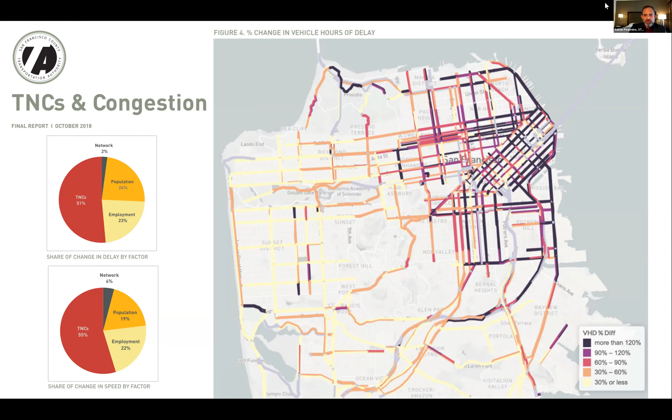In addition to congestion, and actually one of the causes of that congestion, is that our roadways simply aren't built right now to give Uber and Lyft, and even in many cases taxis, very many options for pulling over safely and picking up and dropping off passengers. So not only is this impacting congestion in those communities, it's also impacting safety in those communities. And those are two key issues that we want to solve.

But as was pointed out a few years ago when some of these first studies were coming out, let's not apply all the blame of increased congestion to Uber and Lyft.

It really is still the private vehicle that is the number one cause of congestion, even in our urban centers that have rail and bus transit options. Collectively, TriMet and other peer transit agencies are looking at how they can use transit to connect with these other first and last mile solutions to help solve this problem and get people out of the single occupant or private owned vehicle and into other modes.

So AJ, why don't you pick up here for some of the things that public transportation can do about this, that we talked about in the earlier session. Sure. What we talked about is that TriMet has been creating mobility hubs. These are areas where all different modes congregate, and you can easily transition from one mode to another, to try and transition the industry towards mobility as a service, like a utility.

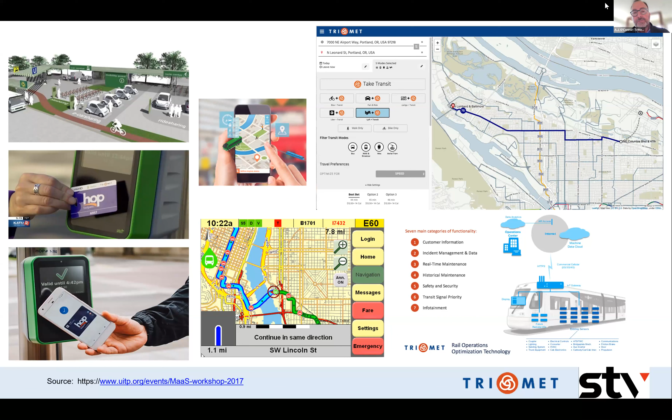The lower left is an example of our electronic fare hop fast pass system. The middle screen is what a bus operator can view on their mobile data terminal, showing their route, and we can send detours to it. Essentially, that's the functionality we want on our light rail vehicle. The diagram in the lower right corner is of our light rail vehicle and the type of functionality we want to bring to it that we currently have on our fixed route bus fleet. Next slide.

So what we're going to talk about the rest of this presentation is how transit is working with cities and other partners, and how we're combining infrastructure, policy, and investment, specifically how we're focusing on corridors and high capacity service. The one project that wraps all these themes together is our next generation transit signal priority system. It really is a good example for all the points we're trying to accomplish.

If you want to go to the next slide. When we talk about next gen, we have to explain what the old gen is, and the old gen is depicted here. It is an optical transit signal priority system where the bus emits infrared and it is line of sight, and there is an optical detector, usually placed on the traffic signal pole, that receives that signal and passes it to the signal controller to decide whether transit signal priority is granted or not.

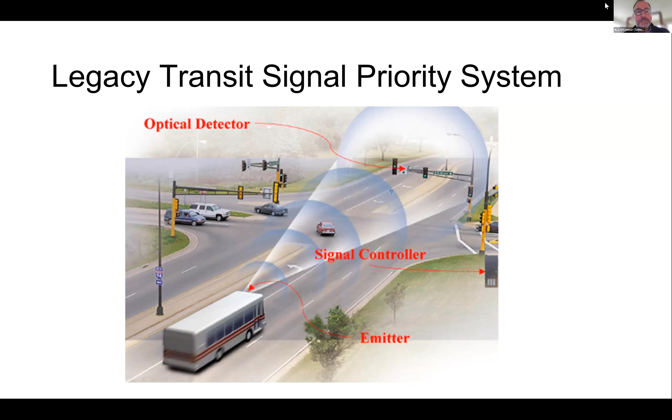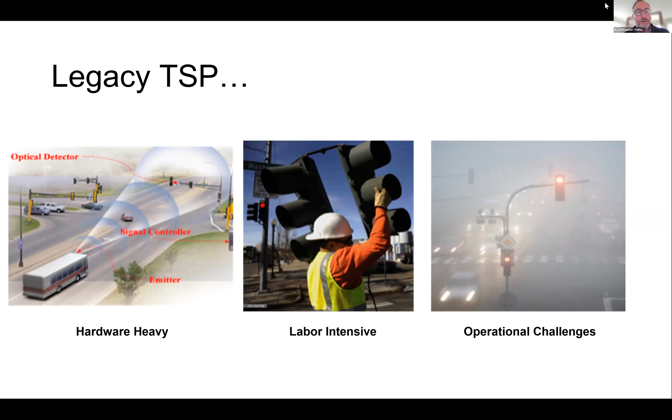Now, 25 years ago, this was cutting edge technology, and at that time TriMet was one of the first major transit agencies to implement any kind of TSP. But it has some limitations, which we're now addressing. As this slide shows, it's hardware heavy - you have to have an emitter in the bus, you have to hang that optical detector on the light pole, and that detector has to be cleaned and ranged. When severe weather happens, which is not uncommon in Portland, sometimes the signal has difficulty being received. Next slide.

So this is how that legacy system is currently set up. On the left side, there's the emitter on the bus, connected to an onboard computer that determines whether the bus is in a particular zone where TSP is present. That onboard computer also knows if the bus is behind schedule. If those two conditions are met, it will turn on that emitter. So it's really what we call dumb TSP - it's very limited, it has to be in range and behind schedule, and that's the extent of it.

And you can see it's detected and then communicates to the traffic controller. There's one other thing I just want to mention on this slide on the existing or current gen architecture: we're also showing the onboard vehicle communicating over that cellular network to the transit center.

So this architecture is communicating between buses and TriMet's dispatch center. This is where bus operators can communicate with dispatchers if they have any sort of problem, security issue, or incident, as well as the transit center being able to communicate out to bus operators when there's detours or other things. But more importantly, for today's topic, there's a steady stream of data coming off of those buses about where the bus is, its heading, direction, speed, how full it is, and other data sets around whether turn signals are on and other types of things. We'll talk about why that matters in the new architecture in a little bit.

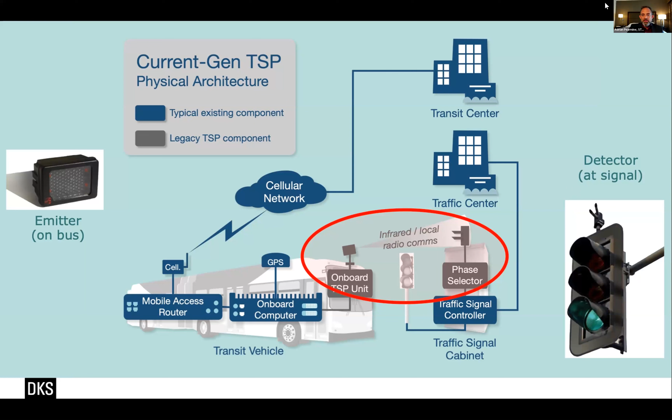So I'll pick up back here for a couple of quick slides and then hand it back to AJ in a second. He mentioned the trends we're seeing around transit agencies working directly with their traffic partners, and that's a pretty critical trend we've seen in a number of markets.

In the Portland metro area, this study was done quite a few years ago now with our traffic partners, the Portland Bureau of Transportation, leading the charge and doing a study on enhanced transit corridors. We've seen similar studies in Seattle, where they call it speed and reliability, and many other markets are starting to look at this. What's happening is that the traffic partners and the transit partners are both recognizing that they can't do high speed, high frequency, high reliable corridors by themselves.

From the perspective of transit, they need their traffic partners to do things like queue jumps at certain intersections that allow buses to jump ahead of other cars and get a dedicated signal for just a second, or business access and transit lanes that can be all day long or just in peak periods where buses have access to them. So there's a whole kit of parts that our traffic partners can implement on their traffic network that transit can take advantage of. And this is just one study.

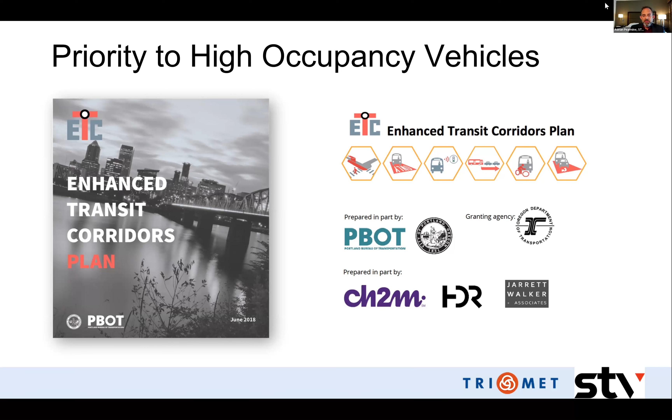Within our Central City in Motion plan, which was a related study PBOT also did, you can see that when done properly, this partnership between our cities and our transit can move a lot more people per hour per lane in buses than we can in the single occupant vehicle. So going back to the early motivators for why we need to be working together between traffic and transit, that figure tells a lot of it.

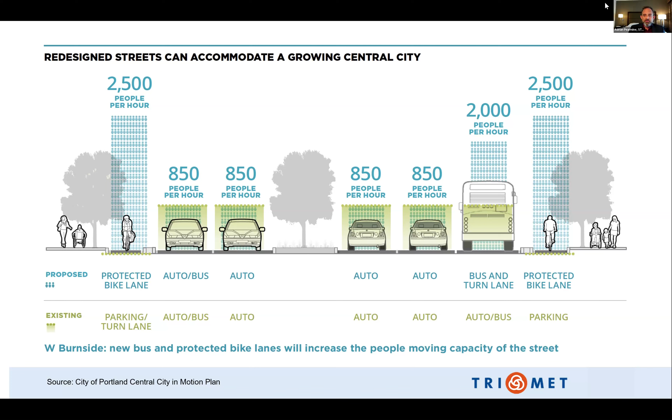As we continue to invest in bike and pedestrian infrastructure and have protected bike lanes, and look at other modes like scooters and how they share that, we can again move even more people through these sections of our roadway network than we can in single occupant vehicle.

As AJ talked about, a lot of this comes together in one particular project. If you can just present the bigger picture of what the Division Transit Project is about, and then how TSP fits within that, AJ.

Sure. So the Division Transit Project was TriMet's first foray into essentially a bus rapid transit system. We picked a corridor that stretched from the east portion of the metro area into downtown Portland, and it required cooperation among 3 different governments: the city of Gresham, which is a suburb of Portland, the Oregon Department of Transportation, and into Portland, the Portland Bureau of Transportation.

It was designed to be branded specifically FX, and we changed our color scheme for that. We procured 60-foot articulated buses that had particular design features: a middle door and rear door, 3 doors total, and electronic fare validators throughout the bus as opposed to just in the front.

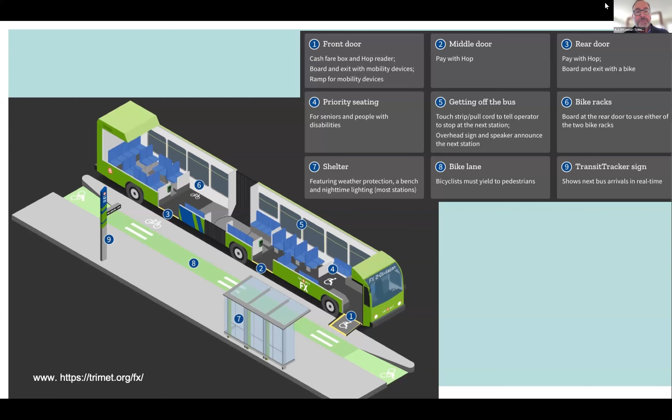So you see the cutout here of the buses and the various aspects that were improved on Division. Adrian, if you can go to the next slide, we'll see an actual picture of what it looks like in practice. You can see the green line is the dedicated bike lane. It's a little hard to tell, but we have much better signage and lighting at all these locations. Next slide.

It was originally called the Route 2. It was rebranded as the FX2 route. And the red rectangle box is where we implemented transit signal priority. The downtown core, we are not allowed to have signal priority in the downtown core, so that's why the section on the left does not have TSP.

One thing to note about this corridor, it is radically different from the east end to the center. On the far right is the suburb of Gresham, and we're talking about a typical suburb, wide streets, not very dense. As you move in towards downtown Portland, it becomes significantly more dense. It's really sort of a tale of two different applications, so it's kind of unique in that regard as well. But it's been a big success.

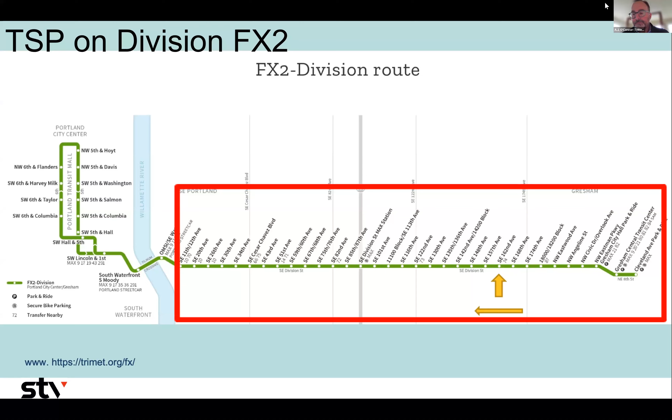Next slide. So this is what we eliminated on this corridor. We no longer required the onboard TSP unit for those dedicated FX route buses. We were able to do that because we have a dedicated fleet, and we did not require the detectors. They are on this route, though, for Portland Fire, who still uses the old TSP system.

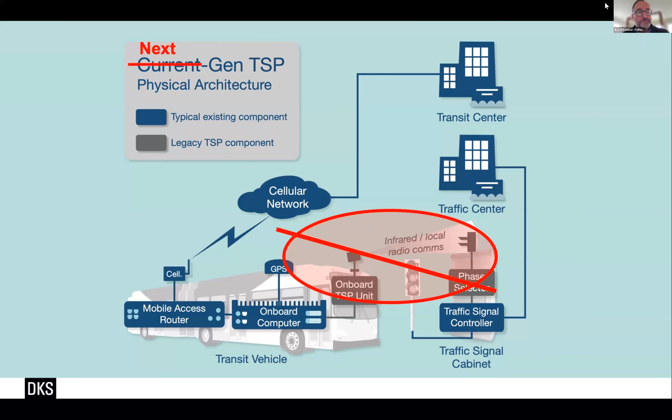And here's the same new architecture slide showing what's in place now. We hadn't mentioned this before, but Light, LYT, is our cloud TSP partner. And you can find out more information on them if you Google Light, LYT AI.

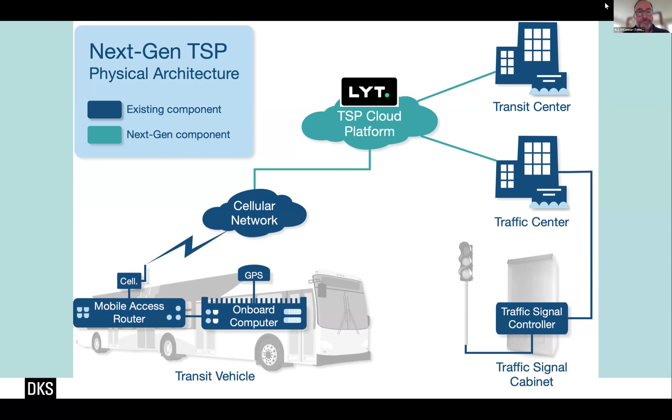So where are we going with this system? One of the big advances with this system is not just the removal of the hardware, but this slide really shows the data flows and how that goes through our system.

Like I said before, the big contrast between the old system and the new system is the amount of inputs we can put in when priority is needed and where. We have so many more inputs than we did with the old system, so many more factors to consider when we grant TSP.

Likewise, on the right side, when the TSP is granted and processed, we now have the ability to really evaluate how that's performing at the individual signal level and along the whole corridor. So this new system really advances the capabilities and the analysis we're able to provide.

One other comment on this slide - as AJ talked about with the current or initial architecture, the signal's not aware of the bus approaching it until it gets within line of sight and a given distance. I say given distance because there's an optimal distance if that equipment is clean and set up directly facing the emitters, of a couple thousand feet, and that only degrades further from there.

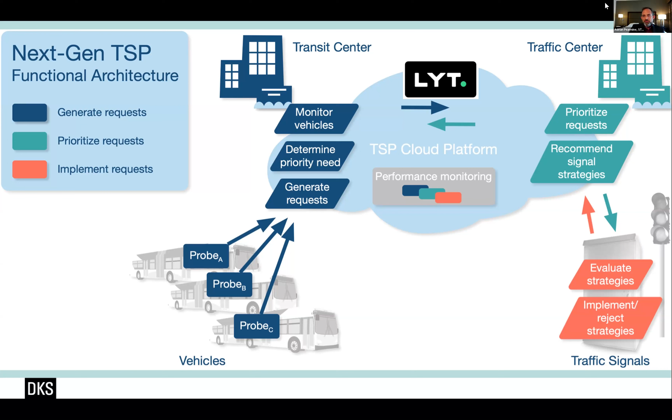Whereas this cloud architecture, the cloud platform is sending estimated time of arrival of when the bus is anticipated at a given signal, well in advance of when that signal could see the bus. So the controllers themselves have more capability to try to get in alignment to either extend the green time and get the bus through that intersection, or truncate red times in other phases if possible, and try to get it lined up to where the bus arrives on a green.

I want to just talk about our reality for the next few years. This slide is basically saying that while we'd love to get rid of that infrared local communications immediately, as we did along the division corridor, it's going to take multiple years to roll the next generation TSP out across all the existing corridors. So we're going to have a hybrid reality TSP physical architecture for years to come, where infrared is still used on corridors that have not swung over to the new system.

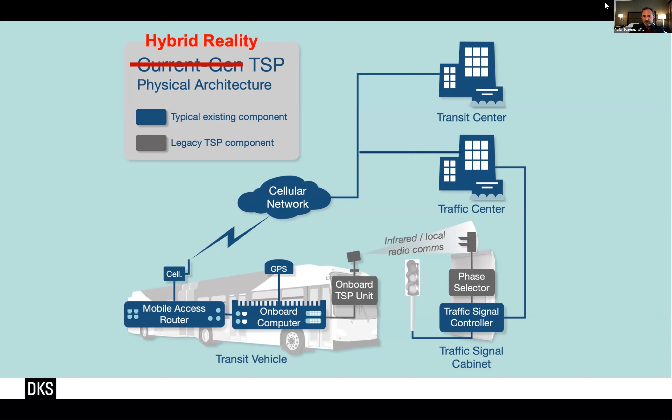So the drum roll now is: how well is this system performing? The first indicators came from our vendors themselves. Light took a look at a couple key performance indicators, one of them being average red light wait time.

The green line is showing the FX route going westbound from Gresham into downtown. The yellow line is showing from downtown out to Gresham. What we're seeing is how long the buses, over the length of that corridor, were having to wait at red lights. The first dashed blue line is when we activated the next gen TSP. Everything to the left of it was previous conditions along this corridor, where it was anywhere from a little under 7 to over 8.5 minutes of red time delay along the corridor.

Then if you go to the right-hand side of this, you'll see that the system had somewhat stabilized. There's still a lot of variability based on weather - we've got some snow and ice days in that period that really change things, holidays when there's not much ridership, and general traffic is not as much on the corridor. So you see some variability there, but you'll see that it's kind of leveled off.

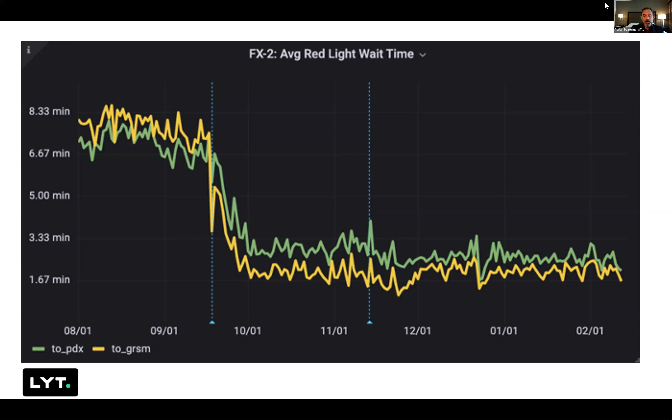The space between the two blue lines is an interesting piece of this. It's rare that we hear a lot of buzz around machine learning and artificial intelligence, but this is one of the few cases where we can actually see it in action. The left-hand blue line was when we turned on the next gen TSP, and then over the course of just that next month, the Light system was ingesting the data, running its algorithms, predicting when the buses were going to arrive at those intersections, sending that estimated time of arrival to the signals, and really getting smarter in a very quick amount of time - and then it has stabilized since then.

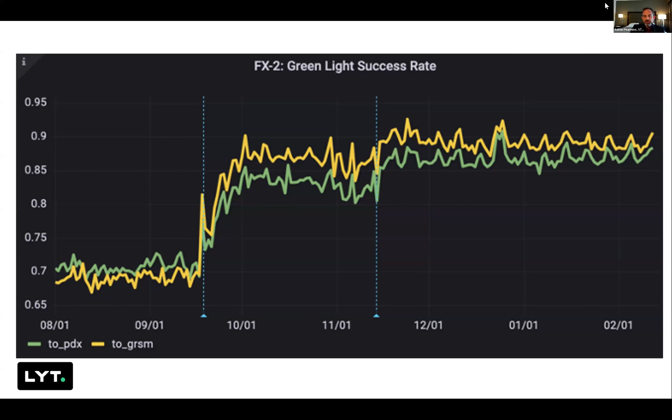Can I add one thing on the green light success that is important? When you have that green light success, that means less idling, less fuel usage. TriMet has definitely seen less fuel usage as a result, and that's one of the criteria that determines success. Fuel savings is a huge benefit to the agency, and the greenhouse gas emission reduction that comes along with that is another benefit of this overall system.

This slide takes a second to explain. In addition to getting raw performance indicators from our vendor, we also needed to do a before and after study. The federal funding required this, and the agency and partner agencies on the traffic side wanted this too. One thing we hadn't talked about before was the Portland Bureau of Transportation's custom logic. In addition to the TSP that Light is providing through this contract, PBOT had done some custom logic at the controller level to better balance and prioritize bike traffic, pedestrian traffic, and improve safety along this corridor, trying to optimize throughput of people in a safe manner.

When we did our study, we would normally have done what we'd call a before and after study, but the conditions along what used to be the Division 2 route, now the FX2 route, changed so drastically that there was no true before and after study. We've reconfigured intersections, consolidated stops to where there's fewer stops in different places. So it wasn't a true apples to apples comparison. We called it an on-off study. In the transit world, that often means you're talking about ridership and people getting on and off buses, so I don't want there to be confusion - this on and off means we turned the system on, we turned the system off.

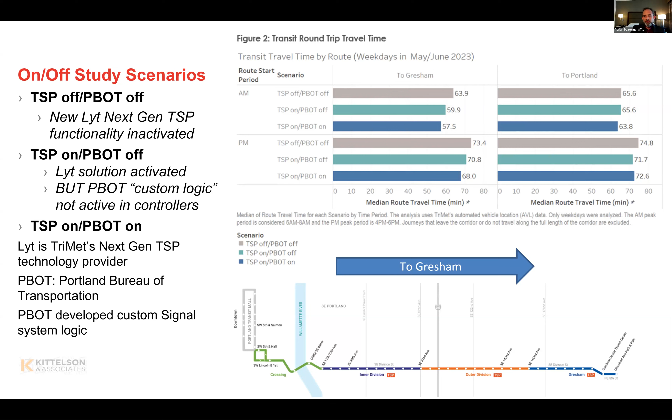What we were very pleasantly surprised to see was the eastbound movement from the city of Portland out to Gresham, with much more significant travel time savings than we were even expecting to see.

But more important potentially than corridor running time, one of the performance metrics that's a bit more meaningful to transit is on-time performance. This gets into what percentage of the time the bus is at the bus stop when it was scheduled to be there. This is really important from a customer standpoint, and how well the system performance is perceived by riders.

So again, we did our on-off studies with TSP off, PBOT off, which is what you see on the left-hand side. This chart's kind of flipped around - the top bars are from Gresham on the east side into downtown Portland, and the bottom half is from Portland out to Gresham: TSP off, TSP on with PBOT's custom logic off, and then TSP on.

What you want to be seeing is a high level of green and a low level of yellow - buses on time, not late. It takes a second to understand how to read the chart, but once you do, it's intuitive: if you're starting in Gresham heading westbound to Portland, the top of the chart for that first segment in the bottom right of the network is blue. You still have a high percentage of on-time performance because you haven't passed many stops or signals yet.

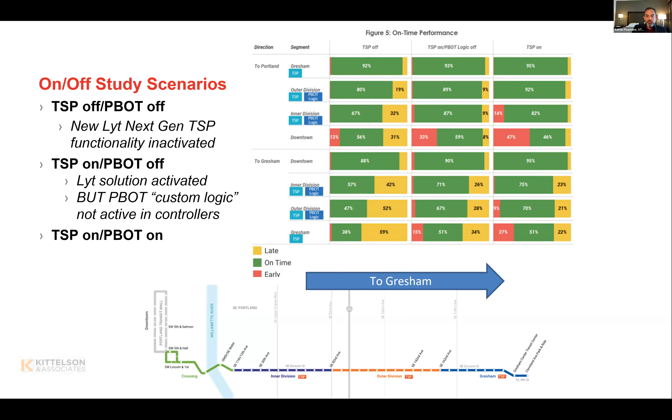One thing we need to be cautious of with this new system is that red bar, because buses arriving at a stop early isn't a big deal as long as they don't leave the stop early - that would be an operational issue. We've shaved so much time off the delay that buses are arriving at some key stops ahead of schedule.

One of the other metrics we care about, maybe not as directly correlated, is ridership. At the end of the day, what all these different technologies are trying to do is improve performance, because we want improved performance to improve ridership. There are a number of factors - the reconfiguration of stops, better bus stations and stops, better travel information, maybe a more comfortable ride in those new buses.

We're not going to claim that this 40% increase in riders over the preceding year was all based on next-gen transit signal priority, but we might want to claim a good percentage of it.

This project has been recognized on an international scale. The Institute of Transportation Engineers picked it this last year as Excellence in Transportation Award within their TSMO, or Transportation System Management and Operations category. That was pretty exciting after all the effort we put into this.